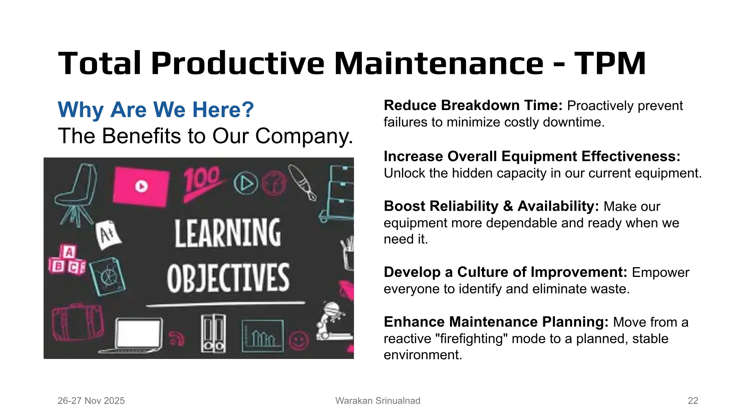These aren't just abstract concepts. They are measurable benefits that will make our work safer, less stressful, and more productive. This is about transforming our approach to maintenance to achieve world-class performance.

This training is designed to be practical. Our goal is to equip you with specific skills. When you return to your work areas, you will be able to think of this as the start of a journey. These objectives are the first steps toward becoming a more effective and proactive team. Everything we cover is designed to help you achieve these outcomes.

Good morning, and welcome back for day 2. Yesterday, we built the foundation by understanding what TPM is and covering the core pillars of autonomous and planned maintenance. Today is all about action and measurement. We'll start with OEE, the key metric for TPM. Then we'll look at how to systematically eliminate the problems that hurt our OEE score. And finally, we'll put it all together in a roadmap for implementation.

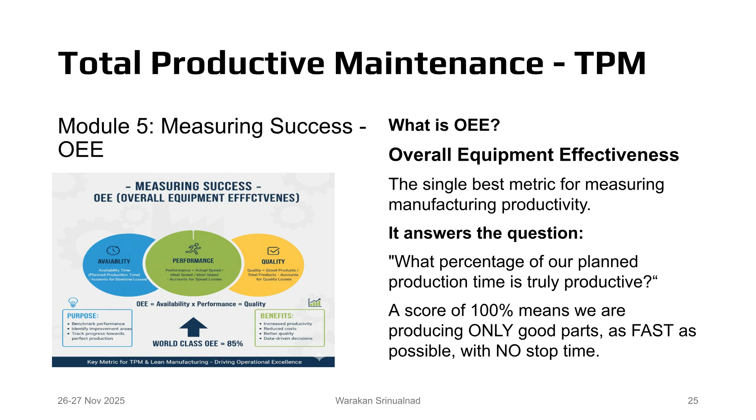Let's get started with our first topic for today, how we measure success. The gold standard for this in a TPM environment is OEE. OEE is a powerful KPI because it combines multiple factors into a single number. It doesn't just look at downtime, it looks at speed and quality as well. It gives us a very honest picture of our performance and exposes the hidden capacity within our factory.

The calculation has three components. Let's break them down. Availability is about downtime. If we plan to run for 8 hours but we're down for 1 hour with a breakdown, our availability would suffer. Performance is about speed. Is the machine running as fast as it was designed to? If the ideal cycle time is 60 seconds per piece, but we are actually averaging 75 seconds, we are losing performance. Quality is simple. Of all the parts we made, how many were good?

If we made 100 parts but 5 had to be scrapped, our quality is 95%. To get the final OEE score, we multiply these three percentages together. This means a low score in any one area will bring down the entire OEE score. Shortly, we'll do a workshop to calculate this ourselves.

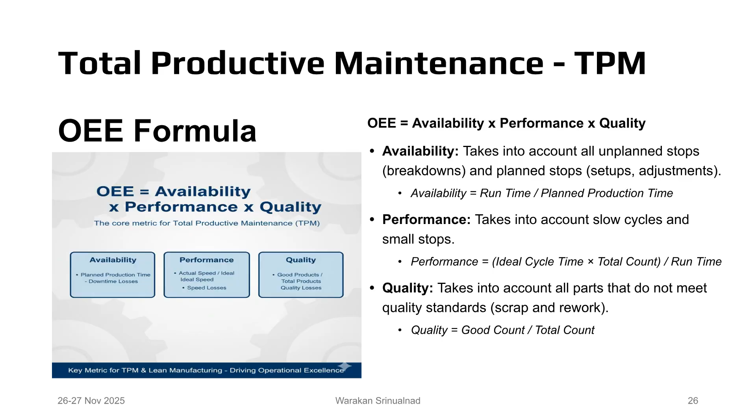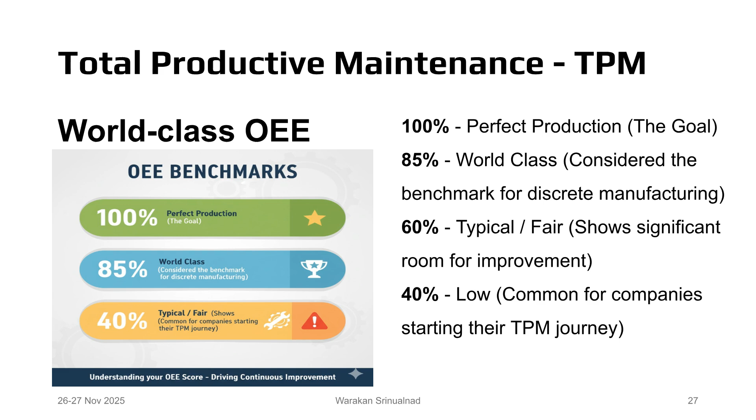So what is a good OEE score? It's important to have benchmarks. 85% is considered world-class. This is a very challenging target to hit and maintain. It's very common for companies to discover their OEE is around 40 to 60% when they first start measuring. Don't be discouraged by this. See it as a huge opportunity. The difference between 60% and 85% is a massive amount of hidden capacity you can unlock without buying new machines.

OEE gives us our score, but to improve it, we need to know where the losses are coming from. This is where the concept of the 6 big losses comes in. These are the culprits that steal our productive time. By categorizing our losses, we can focus our improvement efforts in the right place.

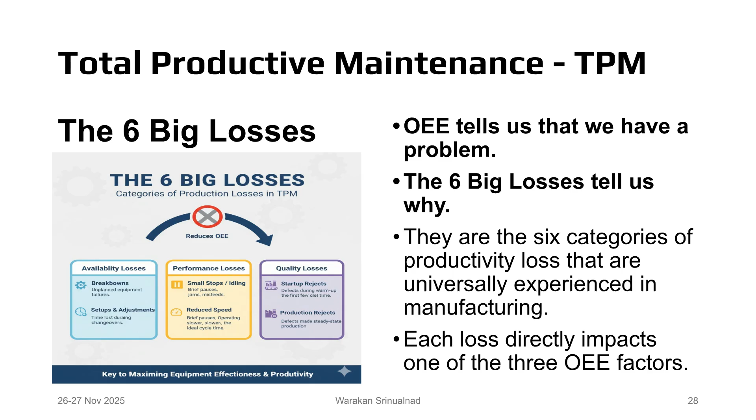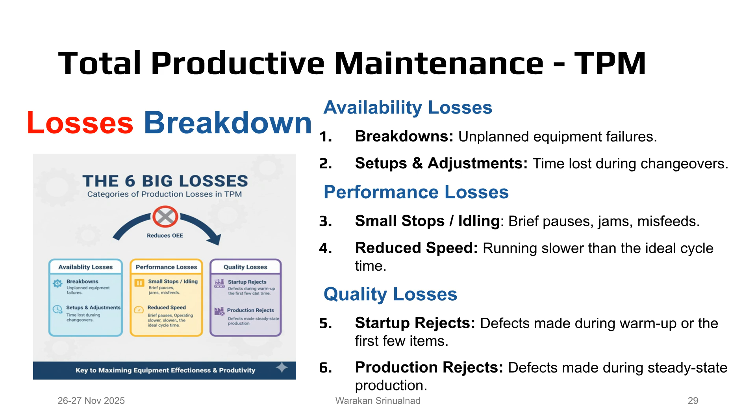Here they are. The first two, breakdowns and setups, hurt our availability score. Small stops and reduced speed hurt our performance score. Small stops are often the hidden factory. Individually, they are tiny, but added up over a shift, they can be a huge source of loss. And finally, startup rejects and production rejects hurt our quality score. Our goal in TPM is to systematically attack and eliminate these losses.

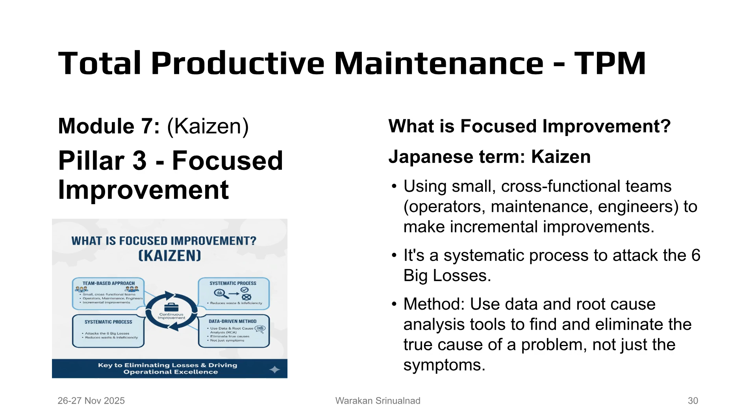This pillar is about how we solve our problems. Instead of one expert trying to fix everything, we form small teams with people from different departments. Why? Because the operator knows the machine's symptoms, the maintenance tech knows its mechanics, and the engineer knows its design principles. Together, they have a complete picture of the problem. The key to Kaizen is that it's about continuous, incremental improvement. Lots of small improvements add up to massive gains over time.

One of the most important tools for focused improvement is the 5 whys. It's human nature to stop at the first answer. The fuse blew, so we replace the fuse. But if we do that, the problem will just happen again.

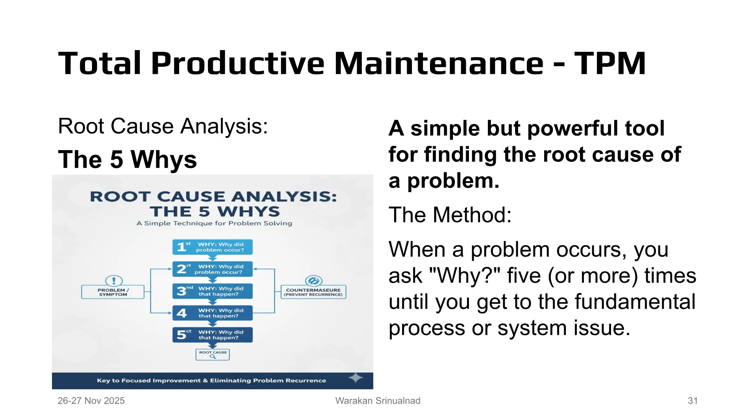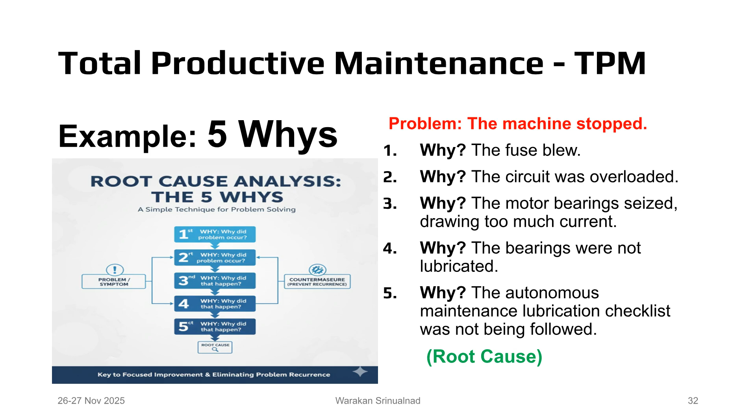By repeatedly asking why, we peel back the layers of the problem to get to the true root cause. In this example, the solution isn't to buy more fuses, it's to fix the lubrication procedure and ensure it's followed. This prevents the problem from ever happening again.

1. Management announcement. It starts at the top. Senior leadership must officially declare their commitment to TPM. This is non-negotiable and signals its importance to the entire organization.

2. Education and campaign. Next, we conduct introductory training for everyone, from managers to operators, to explain what TPM is, its benefits, and how it will work.

3. Create a promotion organization. We build the teams to drive the initiative. This includes a high-level steering committee to guide the strategy and cross-functional pillar teams to do the work.

4. Establish policies and goals. The steering committee defines the TPM vision and sets clear, measurable targets. For example, we will improve overall OEE by 15% in the first year.

5. Formulate a master plan. This is the detailed project plan. It outlines timelines, responsibilities, budgets, and which machines will be part of the initial pilot projects.

6. TPM kickoff. We hold a formal event to launch the implementation phase. This builds momentum and gets everyone aligned and excited for the start of the hands-on work.

7. Implement core pillars. This is where the real work begins. We start with a pilot project, usually on a critical piece of equipment, focusing on the foundational pillars of autonomous maintenance, planned maintenance, and focused improvement.

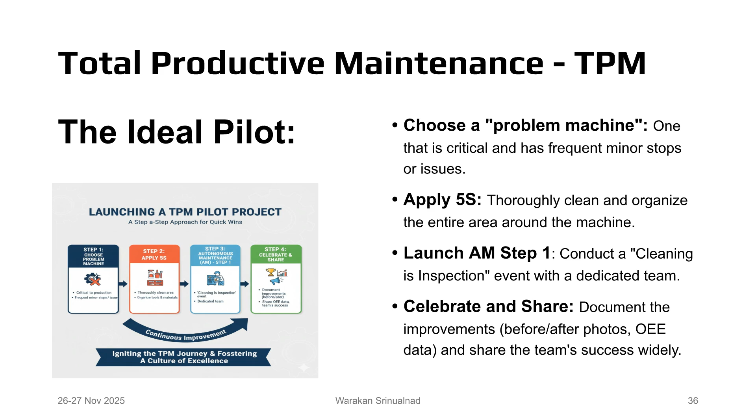Running a 5S and initial cleaning event on a problem machine is perfect. The visual transformation is immediate. The number of abnormalities the team finds is eye-opening, and the improvement in the machine's stability is measurable. This quick win becomes your internal marketing. It proves the concept works and gets other teams excited to start their own TPM activities.

Let's quickly recap what we've covered over the last 2 days. We've learned that TPM is much more than a maintenance strategy. It's a new way of working together to eliminate waste and maximize the value of our equipment. We've explored the core pillars, learned how to measure our performance with OEE, and identified the 6 big losses that we need to attack. Most importantly, we've laid out a practical path to get started.

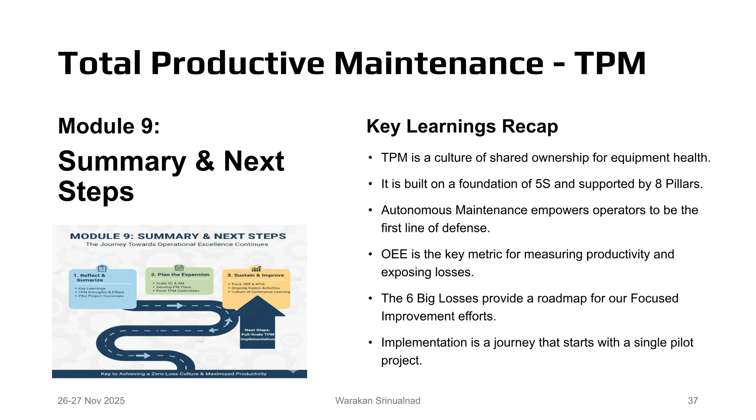The most important question is, what's next? This training is the beginning, not the end. This is a call to action for everyone in this room. For management, it's about providing leadership and resources. For team leaders, it's about identifying that first opportunity for a quick win pilot project. And for everyone, the journey starts tomorrow.

Go back to your workplace and start looking at it differently. Practice 5S. Look for abnormalities. The cultural shift of TPM begins with each one of us.